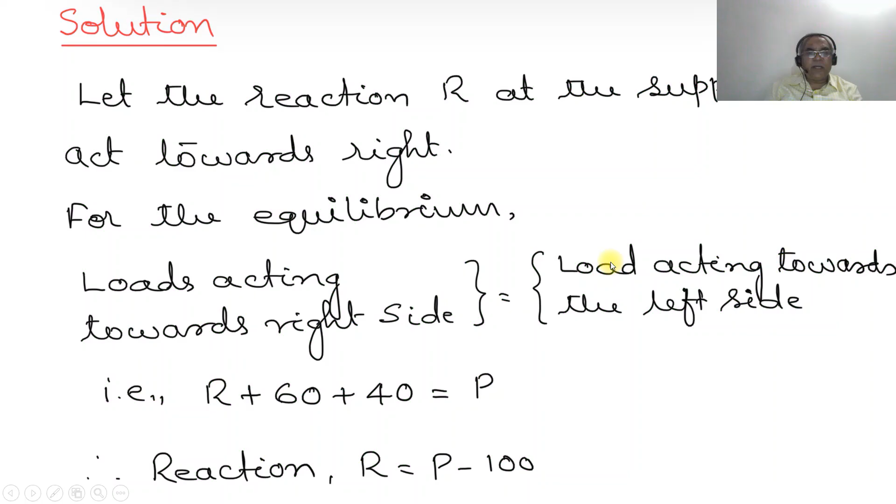Similarly, when you are considering the second segment, here it is P minus of P minus 100. And on this side it will be 60 plus 40, so again 100. In the second segment, P minus P gets cancelled, minus into minus becomes plus, so 100 kilonewton. Here the right section is considered positive.

In the third segment, what we are considering is R first. R is equal to P minus 100. Acting towards the left side is considered to be positive. So it is P minus of P minus 100 minus 60.

So what happens? P minus P cancels. Minus into minus becomes plus. 100 minus 60, which will be 40 kilonewton. Since it is positive, it is acting towards the left side. Then the load acting here on the right side is positive, so 40. So you are getting 40 here also. This is how you will be able to analyze this.

So there is compression in the segment AB, a uniform cross-sectional area of 400 mm square, having a length of 2000 mm, with a compressive load of P minus 100. For BC, it is 400 mm square with a length of 1000 mm, with a tensile load of 100 kilonewton. Between C and D, it is 400 mm square, uniform cross section, with a length of 1000 mm, so it is 40 kilonewton tensile.

Now, since it is a compressive load in segment AB, the contraction of segment AB will be delta L1 equals P1 into L1 divided by A1 into E.

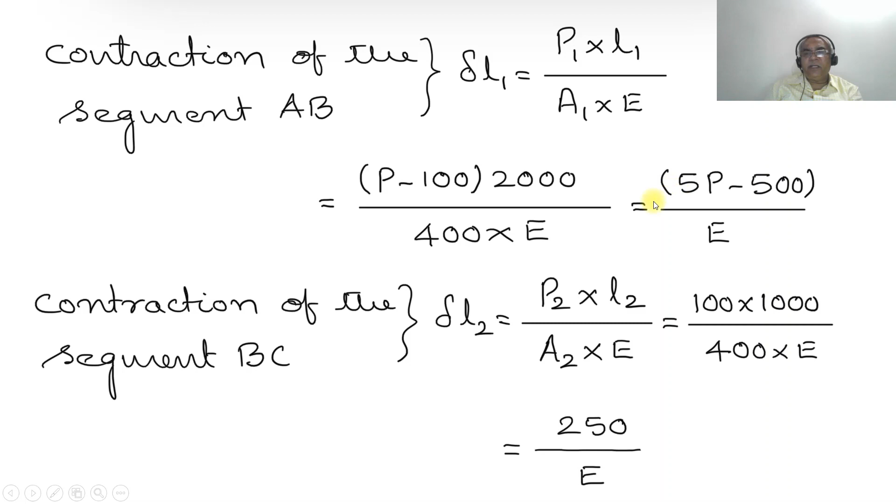So due to the contraction in segment AB, we have written minus of 5P minus 500 by E, plus delta L2, which is 250 by E, plus 100 by E. That is 0. So E goes, and we have minus 5P plus 500 plus 250 plus 100.

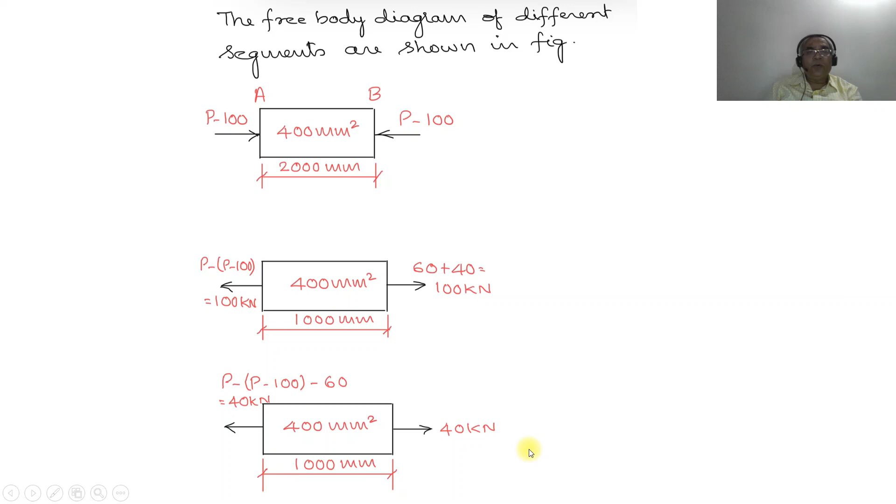So you can take out the entire thing as the common factor and take it to the right hand side: 5P minus 500 is equal to 350. Take 500 to the right side, negative becomes positive, 5P is equal to 850. Therefore, on simplification, load P will be equal to 170 kilonewton. So this is how you find the load P necessary to produce 0 net change in length. The value of load P is 170 kilonewton.

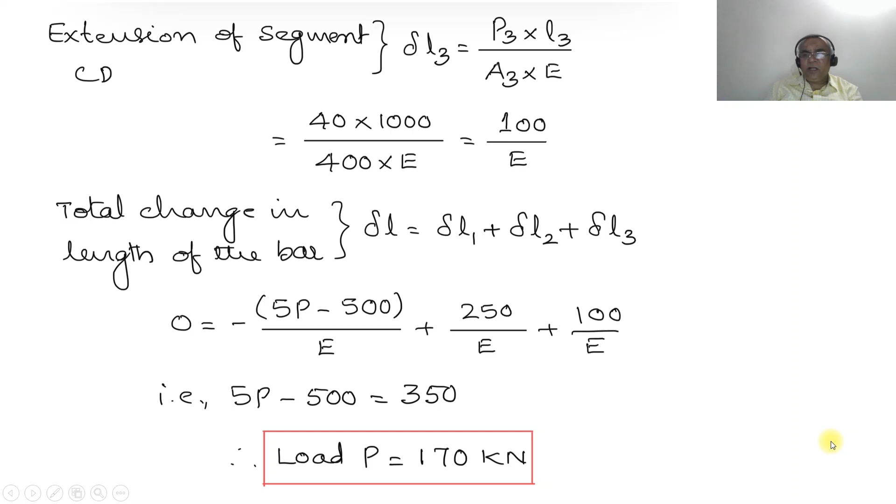Now we go for the next problem, problem number 26. Determine the stresses in the various segments of the circular bar shown in the figure. Compute the total elongation, taking Young's modulus to be 195 GPa. This is an examination problem asked in September 2000.

In the first segment, you have a diameter of 20 with 100 kilonewton acting toward the left side. The second segment has a diameter of 25 and a length of 200. On the left hand side of the diameter 25 segment, you have 300 kilonewton acting towards the right side, and at the other end, 250 kilonewton acts towards the left side. Then in the third segment of diameter 15, having a length of 150 mm, P4 is acting towards the right side.

So now we need to write the solution. First, we need to find out the value of P4 according to the equilibrium condition. So what is the requirement? For the equilibrium of the bar, loads acting towards the right side will be equal to loads acting towards the left side.

So what is that? Loads acting towards the right side: 300 is acting towards the right side. So 300 plus P4 is equal to 100 plus 250. Therefore, load P4 will be equal to 50 kilonewton on simplification.

So now we are going to apply the free body diagram of the different segments. So first we are going to take the diameter 20 of the length of 100 mm. So first on the left hand side, you are going to have 100 kilonewton. So what is the sign convention? Acting toward the right side is positive and acting toward the left side is negative. So according to this, this is acting toward the right side, so plus 300. This is acting toward the left side, so minus 250, and this is acting toward the right side, plus 50.

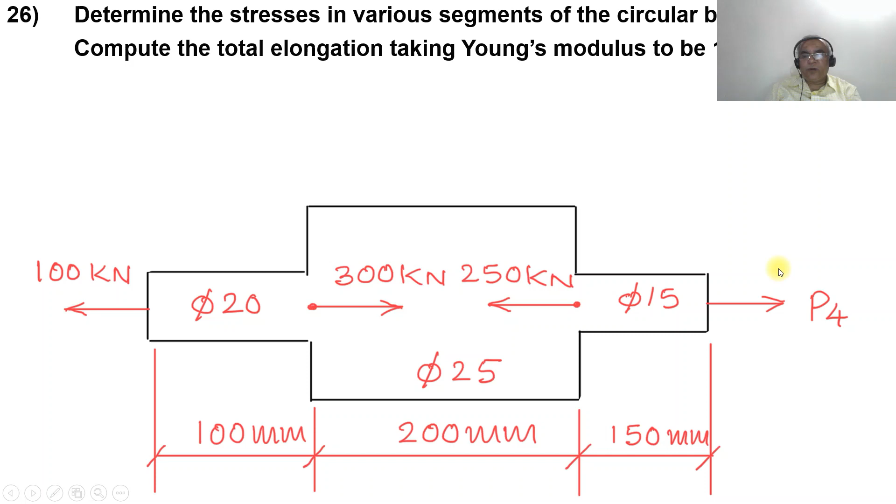Similarly, when you are considering the segment CD, according to the sign convention, load acting towards the right side is positive and load acting towards the left side is negative. So according to this, minus 100 plus 300 minus 250 plus 50. So here on this side, minus 100 plus 300 minus 250. So it is going to be minus 350 plus 300, which is equal to minus 50. According to the sign convention, minus is acting towards the left side. Therefore, you can see it is acting towards the left side by 50 kilonewton.

And in the sign convention, the load acting towards the right side is positive. Since P4 is acting towards the right side, the value of P4 is equal to 50. So in this case also, it is going to be 50 acting towards the right side. So this is how you will be able to summarize this. So what is the summarization? The segment AB has a tensile load, the segment BC has the compressive load, and the segment CD again has the tensile load.

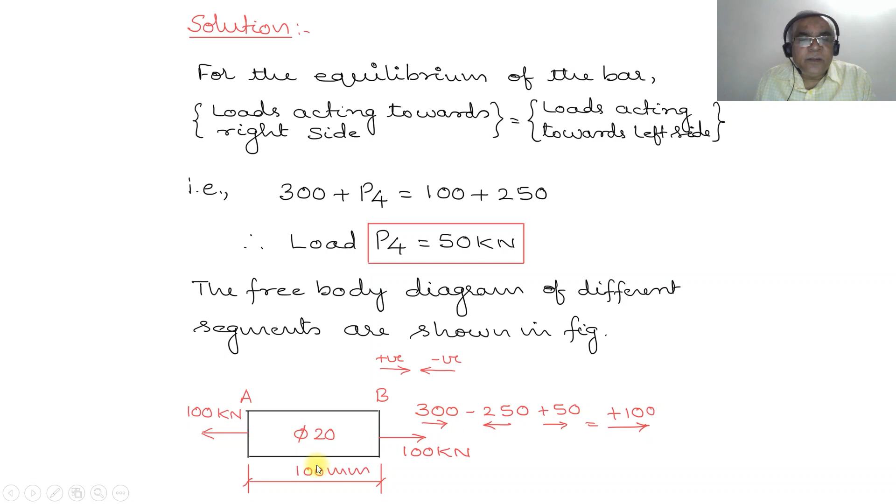Now we are going to take the stresses in the segments. So stress in the segment AB is sigma 1, which will be equal to P1 by A1. So what is the value of P1 here in segment 1? It is 100 kilonewton. So sigma 1 is equal to P1 by A1. P1 is 100 into 10 to the power of 3, by A1, pi by 4 into 20 square.

So pi by 4 into 20 square. So it will be equal to 318.31 Newton per mm square. Since it is a tensile load, you are going to get tensile stress; therefore sigma 1 is equal to 318.31 Newton per mm square.

Now when you consider the stress in the segment BC, again you have the load by the area of cross section. So here it is 200 into 10 to the power of 3. Sigma 2 is equal to P2 by A2: 200 into 10 to the power of 3 divided by pi by 4 into... So what is the area of the segment? The diameter is 25. So pi d square by 4, which will be equal to pi by 4 into 25 square. So on simplification, sigma 2 will be equal to 407.437 Newton per mm square. Since it is a compressive load, the stress developed is compressive stress.

Now we will go for the stress in the segment CD, which is sigma 3, equal to P3 by A3. In the segment CD, you have a tensile load of 50 kilonewton. So 50 into 10 to the power of 3 by pi by 4 into 15 square. On simplification, sigma 3 will be equal to 282.942 Newton per mm square, which is again tensile.

So now we will go for the elongation of the segment AB. Since it is a tensile load acting on the segment, naturally it is going to be an extension. The elongation of the segment AB, delta L1, is equal to P1 into L1 by A1 into E. P1 by A1 is sigma 1, so it is sigma 1 into L1 by E. What is the value of sigma 1? It is 318.31. You substitute that value into length of the segment, 100, by E, 195 GPa, 195 into 10 to the power of 3, which is equal to 0.163 mm.

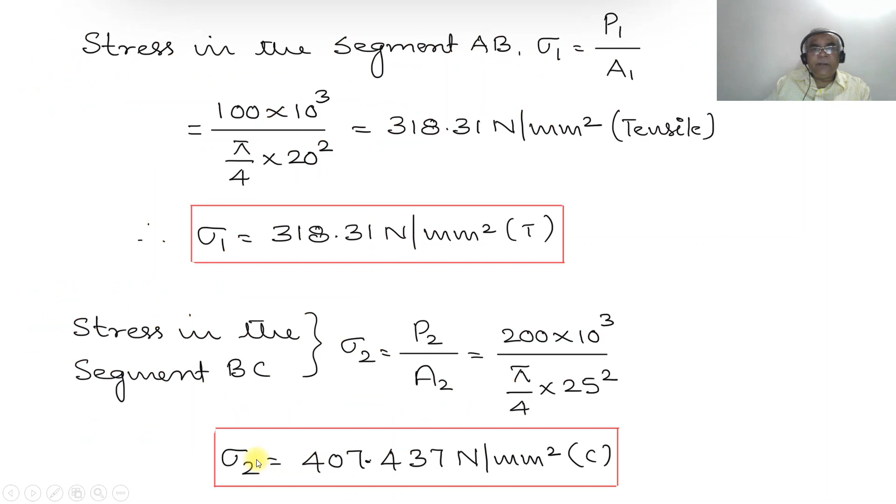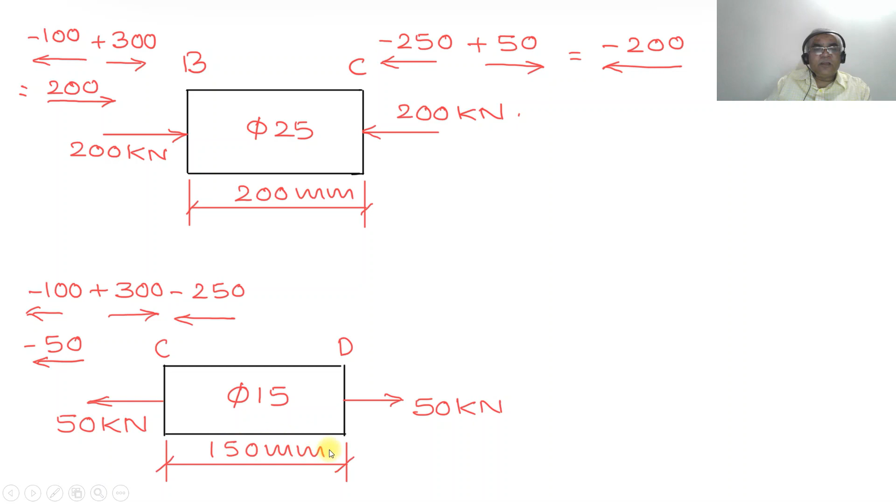Similarly, when you are considering segment 3, again you have a tensile load. Delta L3 will be equal to P3 into L3 by A3 into E. P3 by A3 is nothing but sigma 3, so sigma 3 into L3 by E. Here L3 is 150. So the elongation of the segment CD, delta L3, is sigma 3 into L3 by E. Substitute the value of sigma 3, 282.942, into 150, the length of the segment, divided by E, 195 into 10 to the power of 3. On simplification, you get 0.218 mm.

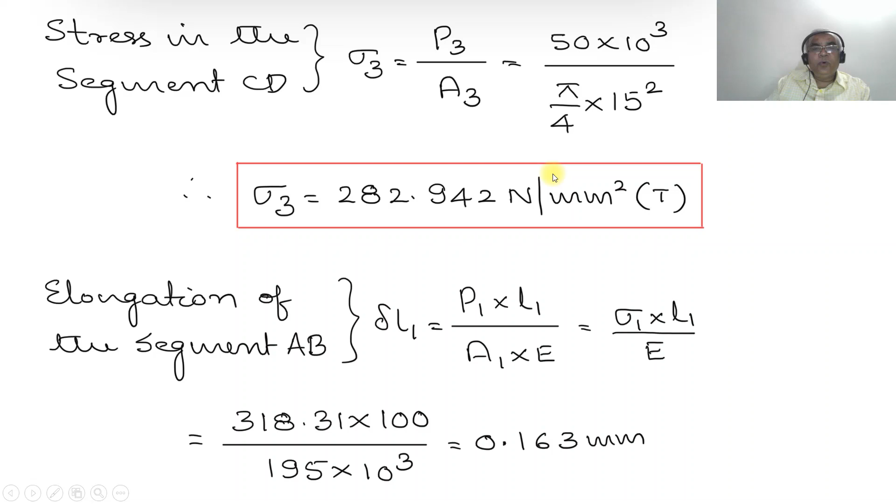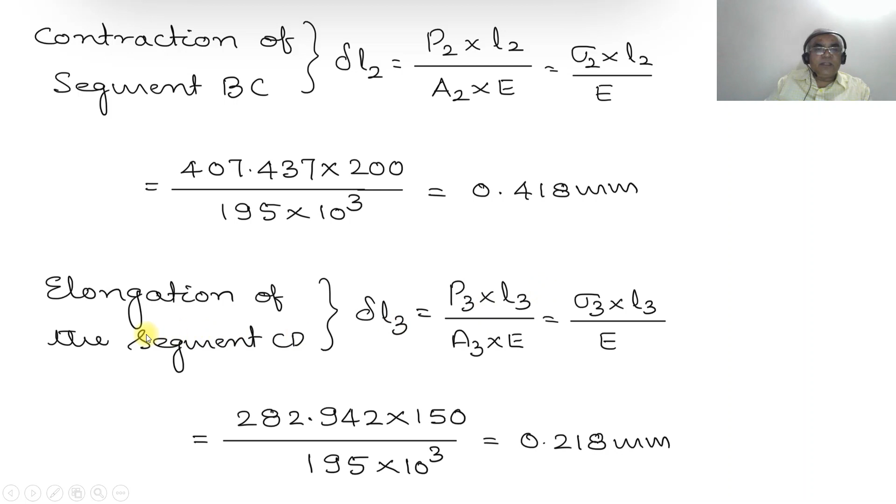Now what is going to be the total change in the length of the bar? It is given by delta L equal to delta L1 plus delta L2 plus delta L3. Delta L1 is 0.163, which is elongation, so positive. Delta L2 is contraction, so minus 0.418, plus delta L3, 0.218. So 0.163 minus 0.418 plus 0.218. On simplification, delta L will be equal to minus 0.037 mm. Therefore the total change in the length of the bar is 0.037 mm contraction. Since it is a contraction, naturally it is a decrease in length. So this is how you will be able to solve this particular problem.